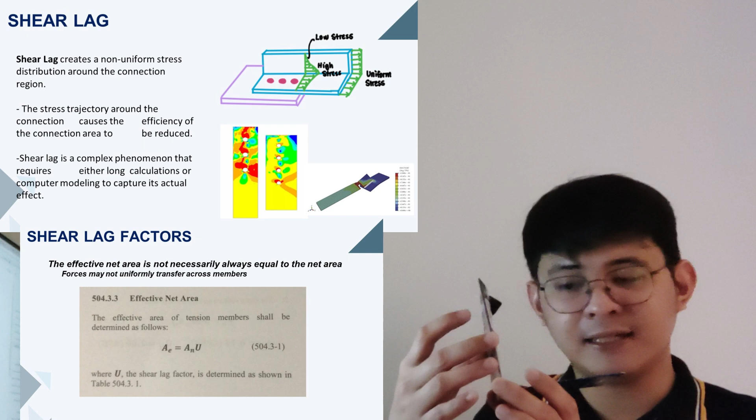of stress. So the intensity of stress will differ in this part, especially when there are holes and bolts. The effect on this part is intensified, carrying a strong stress because of the holes in this portion. And then this other part of the element receives only a little stress. So to consider only the portion with high stress intensity, we need to reduce the effect of the shear lag, the shear stresses, and multiply it by the effective net area.

Now our shear lag is defined as the reduction of the net area, wherein we multiply by a value of 1 or less than 1 so that we only consider the portion of our section that really carries high stress. And then we lessen the consideration of the element that does not hold a large stress value. That's why we need to reduce the net area, the effective area, by multiplying it with a value of 1 or less than 1 depending on the number of elements.

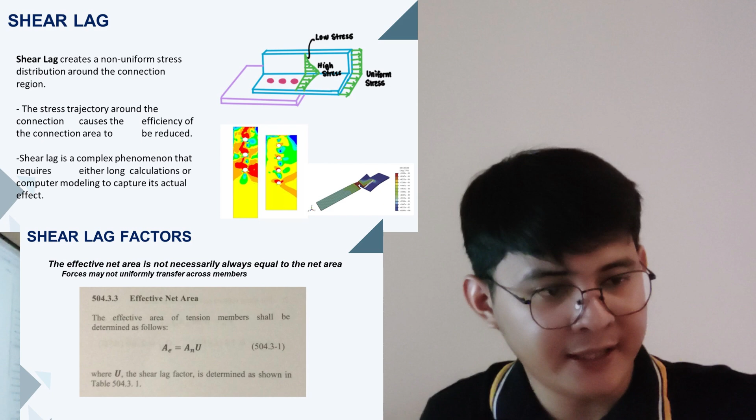Okay, so what is the formula we will use? For shear lag, here it is. Shear lag creates a non-uniform stress distribution around the connection region. The stress trajectory around the connection causes the efficiency of the connection area to be reduced. So we reduce the efficiency because of the non-uniform distribution, from high intensity in the part with the connection and then going to the less connected part. Since not all of the load transfer goes to the other section elements, we need to reduce the efficiency of our tension member.

Okay, so we expect that the distribution in the parts that are not connected has lower intensity. All these stresses are trying to exit the connection and transfer due to the shear interaction we call shear lag. Because of the bolts, right? The bolts have shear. So we need to reduce the effect of the net area to consider only the portion that results in less tension force. So, according to our code, section 504.3.3,

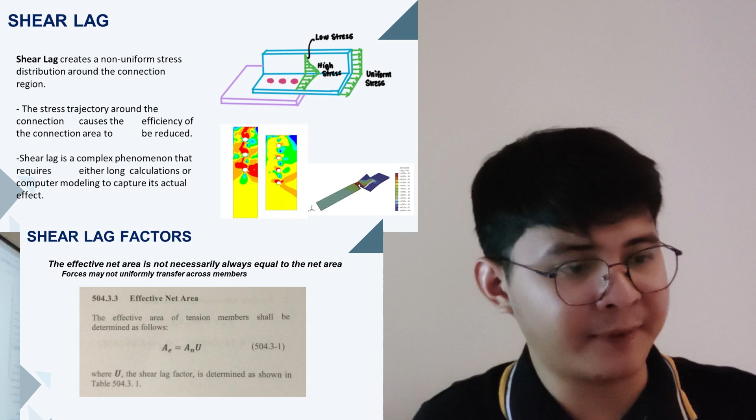to get the effective net area, we need to consider the net area, where we have subtracted the diameter of the holes, and then multiply it by the value of U. So now, what is the U that we consider here? We need to refer to table 504.3.1, or in AISC, this is table D3.1.

Now, to account for this non-uniform transfer of stresses among elements of a steel section, this table, especially in AISC and NSCP, summarizes their different research data. They sampled different sections and came up with these expressions and factors that are not complex. We have 8 cases here that we need to use in the analysis and design of tension members, to consider the effect of shear lag somehow. So we no longer need a finite element model to get the actual effect of shear lag. AISC has provided us values to somehow consider those effects of shear lag given different sections and different types of connections. It can be a welded or bolted connection.

So, note that there are multiple cases that can be applied for a given single connection. So, say for example, when we're considering wide flange, we can use either case 2 or case 7. Most of our formulas here are empirical and derived from extensive research. Isa-isahin natin yung mga shear lag factor.

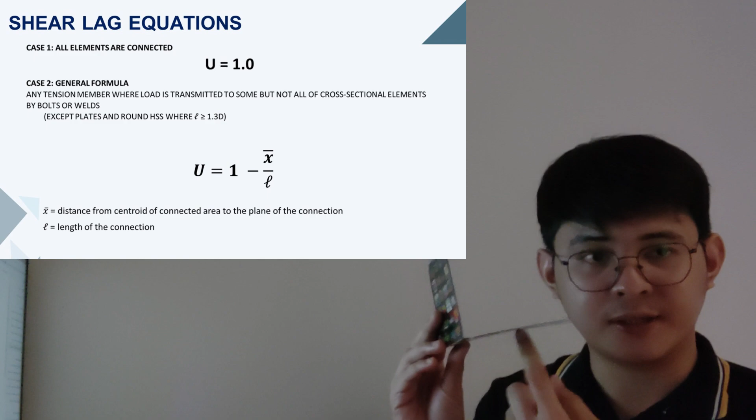So, kapag lahat ng elements ay connected, yung value natin is 1.0. Especially dun sa flat plates natin, kasi isa lang yung element, connected na siya. So, automatically, yung U natin is 1.0. Now, kapag angle bar siya, kapag itong part na to, connected din, meron siyang bolts or welded, and then itong part na to is connected din, yung gagamitin natin is 1.0.

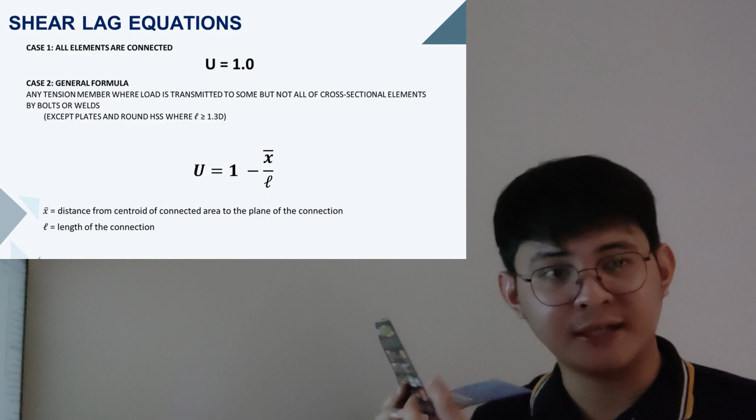Pero, kapag isa lang yung connected, kailangan natin pumunta dun sa case number 2, wherein yung formula natin dyan is 1 minus x bar over L. So, case 2 tends to apply to most tension member connections. The formula is U = 1 minus x bar over L, wherein yung x bar is the distance from the centroid of the connected area to the plane of the connection. Ito yung member natin na connected, and kung ano daw yung centroid nito, and then yung distance niya dun sa face nung connection,

yun yung maging x bar. So, may mga research na usually para mas mapadali yung analysis natin, we try to somehow make our U as 1.0. So, paano ba natin ginagawa yon? Kasi kapag 1.0 yung U natin, mataas yung value ng area natin, mataas yung value ng strength. Ngayon, kapag nireduce pa natin yan, mababawasan yung capacity yung kayang i-hold ng tension member natin. So, ano ba yung ginagawa para as much as possible, yung value ng U natin is 1.0.

So, to consider the value of U as 1.0, kahit yung connections natin ay hindi lahat ng element nakakonect, ang gagawin natin is usually nilalakihan natin yung value ng L. So, kapag mahaba yung connections natin, yung length of connection na tinatawag, yung value ng U natin is almost close to 1. Kasi 1 minus x bar and then large value of L, so almost 0 na yan. Wala na siyang isusubtract pa. So, yun yung ginagawa para mas makuha pa din natin yung value ng U na 1.0. Pero in the case na yung value ng L natin is sobrang mababa, kailangan natin gamitin yung formula na to. And then yung formula na to, nagbabago-bago pa, depende sa type ng section natin na gagamitin kasi magkakaiba yung centroid. So ngayon sa next slide natin, nakapresent dito yung different value ng x bar.

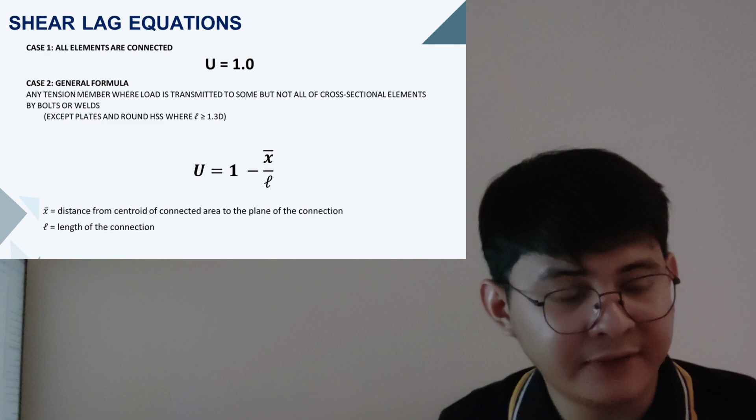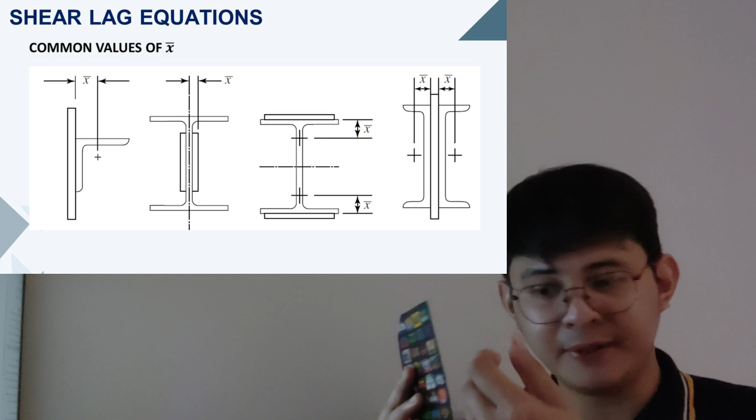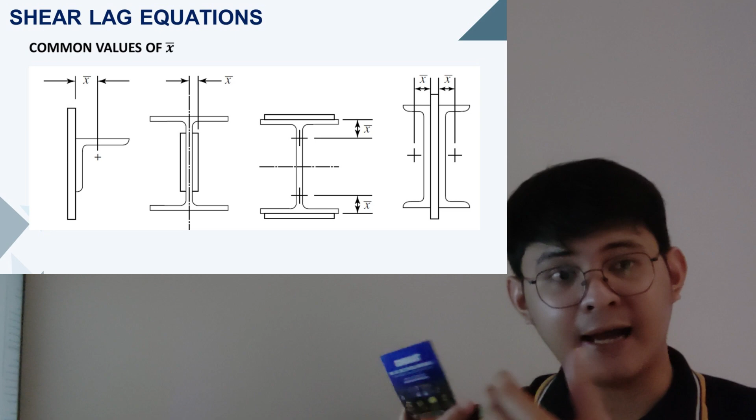So say for example, meron tayong angle bar, then nakakonect siya sa plate. Yung x bar na gagamitin natin is depende dun sa orientation ng angle natin, kasi meron tayong longer leg and shorter leg. Kapag yung longer leg, which is yun yung common, connected siya sa plate, ang gagamitin natin is x bar from your steel manual. Yun yung gagamitin natin. Pero kapag baliktad, kapag yung shorter, ang gagamitin natin is yung y bar from your steel manual. So mabilis lang naman yan, depende sa kung ano yung nakakonect.

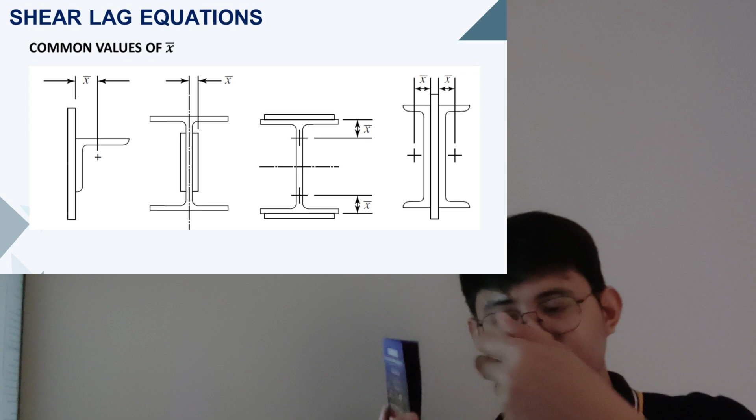So kapag ito yung longer, tingnan natin yung x bar niya. And then kapag shorter, yung y bar from your steel manual yung gagamitin. So take note, yung centroid, papunta dun sa face ng connection natin. So mabilis lang naman. Automatically, yun na yun yung x bar. Yung x bar dun sa steel manual, yun na yung gagamitin natin kapag ganito yung configuration or setup ng connection.

Ngayon, kapag meron naman tayong wide flange na pinalaman na ng steel plate, ang formula lang natin ng x bar, yung x bar na gagamitin natin is yung center lang ng wide flange plus the face of the cover plate, yung dulo ng cover plate natin. So, mabilis lang, no? Mabilis lang siya intindihan kapag sandwich siya ng plates, yung wide flange.

Ngayon, kapag cover plated naman yung wide flange natin, meron sa taas or meron sa baba, yung connection natin, ito yung wide flange natin, yung flange niya, ito yung may connection, ang gagawin natin, or yung x na gagamitin natin is just hatiin lang natin yung wide flange. So, ano yung kalahati ng wide flange? Magiging T na siya.

So, yung T na yun, sa steel manual natin, meron tayong properties ng T-section doon. And then, kung ayaw nyo isolve yung centroid from the top of the flange, papunta dun sa along the web natin, pwede kayong mag-refer dun sa steel manual and kunin natin yung hindi yung x bar. Ang kukunin natin dun sa steel manual is yung y bar, kasi yung orientation ng T-section natin is vertical. So, yung x bar na gagamitin natin is the y bar of our T-section.

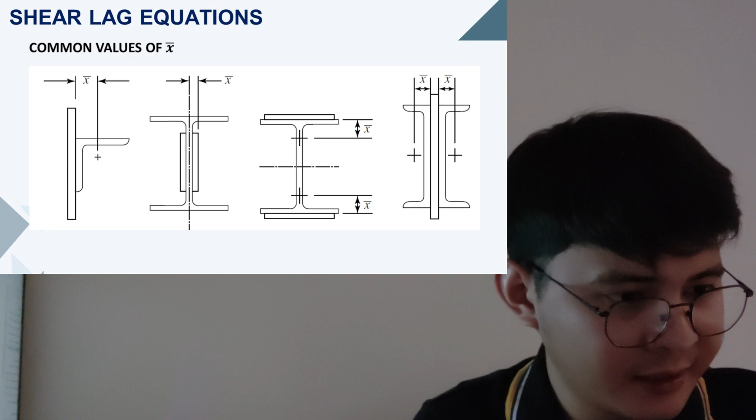So, for now, let's continue discussing muna yung mga values ng shear lag. Okay, so ano ba yung values ng L? So, kapag this is a bolted connection, yung L natin is just the end-to-end of the length of our connection. So, for bolts, kung ano yung distance center to center from the most edge unto its final or yung end na connection natin, yun yung L. And then, kapag nakastaggered naman siya, yung center to center ng first bolt natin, and then yung center din ng final bolt natin sa connection.

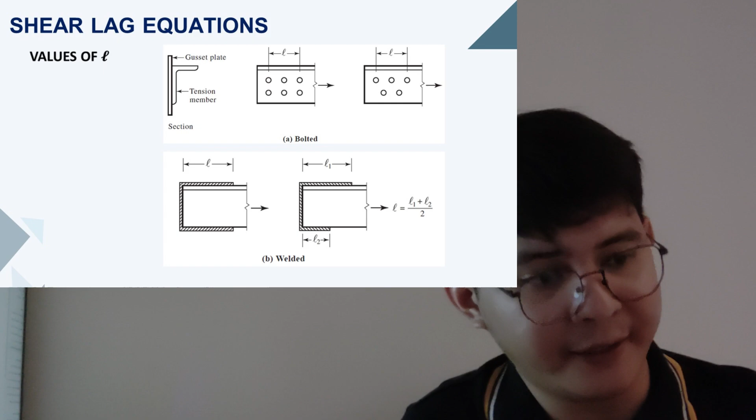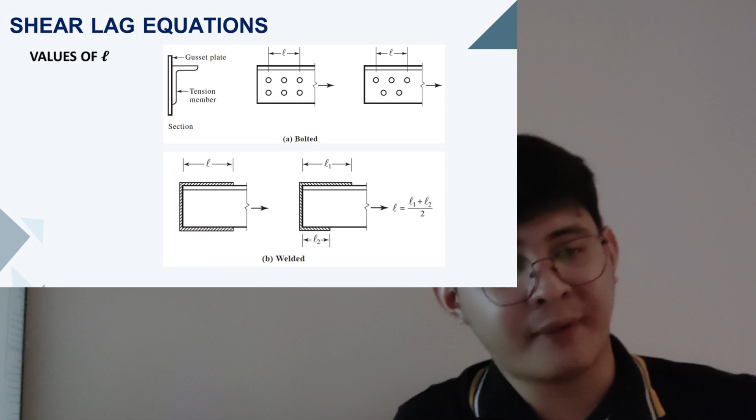Pero kapag naka-welded siya, kapag same lang din naman yung longitudinal welds na kinukonsider natin, so longitudinal welds, pwede natin magamit yung case 2. So magagamit lang natin yung case 2 kapag welded kung meron tayong longitudinal as well as transverse. So longitudinal sa taas and sa baba, and then meron tayong transverse weld vertical. So to get the value of the L for welded, kapag same lang yung upper and then lower length ng welds natin, automatically, yun na yung L natin. Pero pag magkaiba yung top and yung bottom, kukunin lang natin yung average ng length ng top and then ng lower to get the value of the L that we are going to use for the formula 1 minus X bar over L. So, yun lang, di ba?

Madali lang. Next, case number 3, this case is yung parang hindi common na connection. So, for case 3, involved tayo ng transverse weld. Kapag ganito, meron tayong transverse weld, pero kulang ng isang connection na longitudinal, ang kailangan lang natin i-consider na area is the area of directly connected elements. So, kung ano lang yung area na may connection dun sa weld, transverse weld, and then also yung longitudinal, yun lang yung area na kailangan natin i-consider for our calculation of the effective net area. So, kapag meron kayong configuration na ganito, transverse, and then longitudinal, yung area na gagamitin is the area directly connected to the elements, and yung U natin is 1.0.

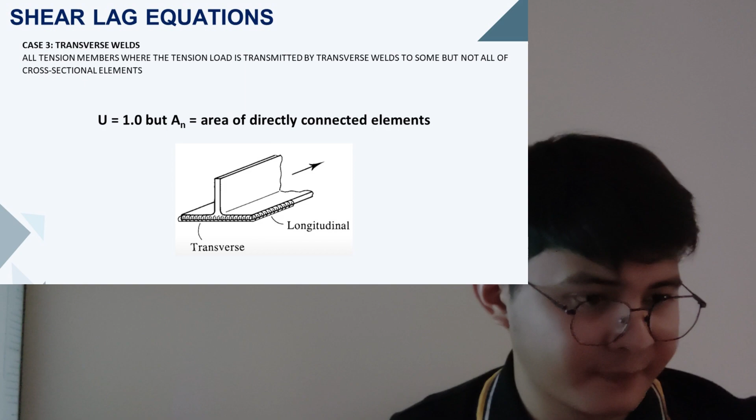So, case number 4, this is for plates and also welds. So, ngayon, kapag meron naman tayong connection wherein connected siya by a weld, pero longitudinal lang yung welds natin, we can use this provision. So, kapag yung L or yung length ng welded connection natin is greater than 2W, or yung perpendicular distance ng dalawang longitudinal welds, we are going to use 1.0. But if it is between 1.5W and 2W, gagamitin natin is 0.87. So, take note that we need to consider or solve muna the length and also the width in order to check for us kung ano yung gagamitin natin na U value.

Pero kung ayaw nyo nang isolve pa yung condition, i-relate yung width and then yung length, pwede nyo nang isolve agad yung U, wherein for approximate value of U, we can use this formula which is 3L squared over 3L squared plus W squared times 1 minus X bar over L. So, take note na yung L natin dito, kapag same, automatically, yun na yung L. Pero kapag hindi same, average yung gagamitin nating value ng L.

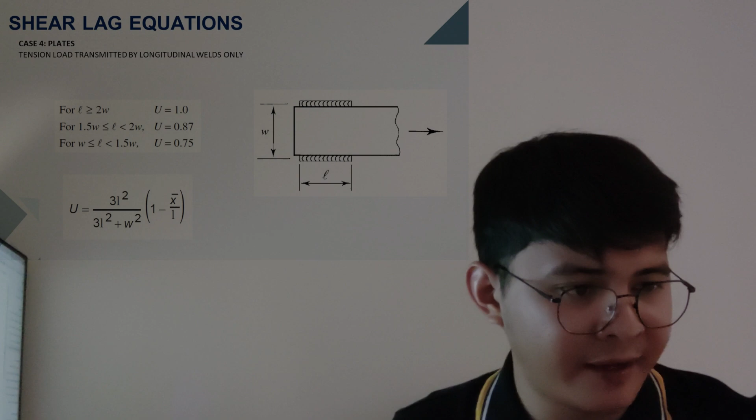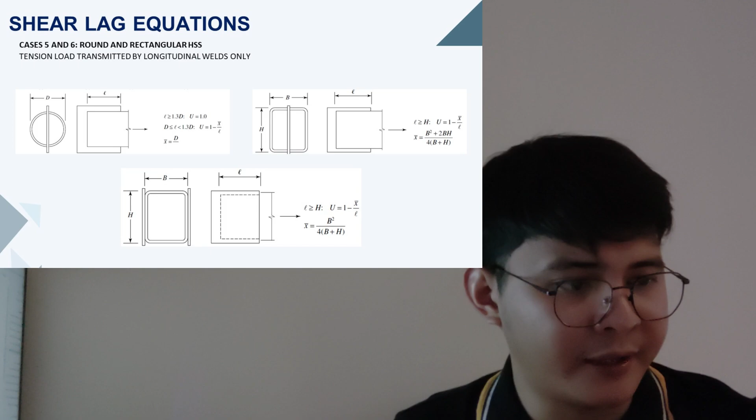Now, for the shear lag equation, case 5 and 6, this is for round and rectangular HSS. So, mostly hindi tayo solve ng problem regarding HSS. But for case number 7, this is very common for our wide flange. So, wide flange T for this shape. So, dalawa yung condition na kailangan nating i-consider. Usually, ginagamit natin yung case 7 kapag wala pa kayong length ng mga bolt connection. So, for estimation, we can use case 7 kung ano ba yung gagamitin nating U value.

Ngayon, kapag ang kinoconsider natin is yung flange, we need to check first kapag meron tayong 3 or more fasteners. So, ang fastener na sinasabi dito is kung ilan yung bolts na connected per line. And then, yung per line natin, ito yun, per line. So, say for example, ito yung wide flange natin. Wala kasing figure. Mamaya, pakita ko na lang kapag nag-solve tayo ng problem. Pero kapag wide flange naman, kapag dun sa left and right, automatically, dalawang line na yon. Pero yung number of fastener, kung ilan yung bolts dun sa line na yon. So, kapag more than 3 siya, we can use this provision under case 7 for flange. And we need to check yung value ng width ng flange natin if it is greater than 2/3 of the depth of our wide flange.

Kapag yung BF, width ng flange, is greater than 2/3 ng depth, we can use U is equal to 0.90. Pero kapag less than siya, we can use the U value of 0.85. Now, for case 2, kapag sa web naman, we will use U is equal to 0.70. Now, kapag meron kayong value ng L na,

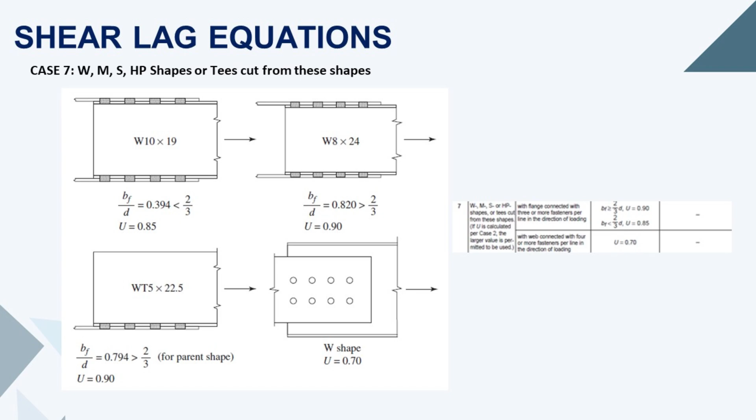and then gusto mo pang i-check yung case number 7, especially sa wide flange, so meron kang case 2, and then case 7, so dalawa yung magiging value mo ng U. Ang kailangan natin gamitin is yung larger. So, yung larger value. Okay, so, for case 7, check natin kapag yung connection natin ay nasa wide flange or nasa web.

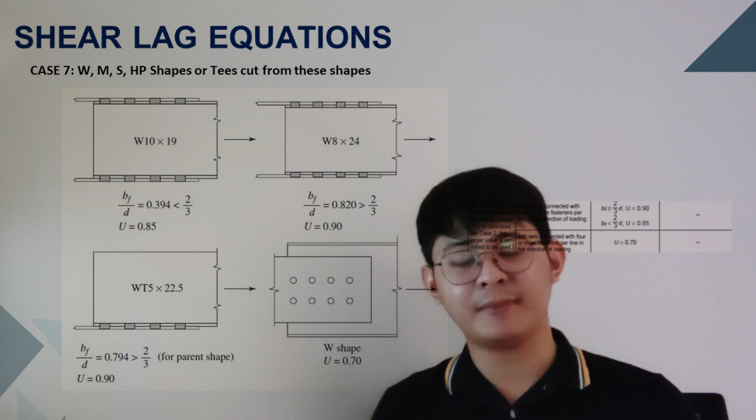And then, check natin kung ilan yung number ng fastener or bolts dun sa isang line ng connection natin. So, if it is more than 3, we can use the upper part of this code and then check natin yung 2/3 ng depth natin as compared to the width of the flange. And then, kapag meron na tayong length, we need to compare the value whichever is greater between case number 2 and case number 7. So, ang meaning lang naman yun, simplify. Kung ano yung mas malaking value ng U, yun yung gagamitin natin as a shear lag factor.

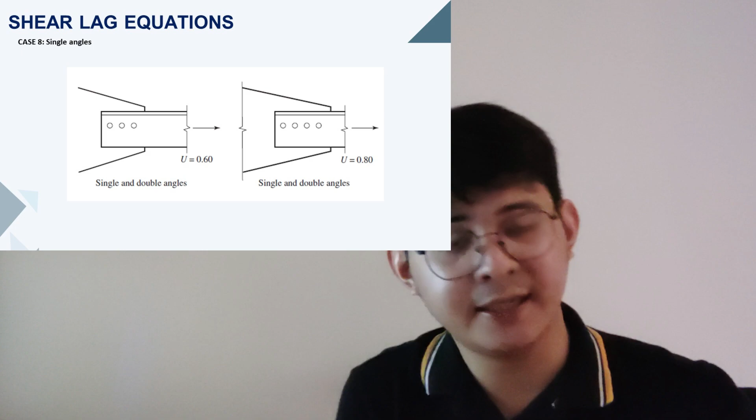Now, the case 8 is applicable for the angle bar, single angle bar, and we need to check kung ilan yung dami ng fastener natin sa isang line ng connection. So, kapag it is 3 fastener, we are going to use U is equal to 0.60 and then U 0.80. So, again, we need to compare it with case number 2. Whichever is larger, then yun yung gagamitin natin as the shear lag factor to calculate for the net area.

Okay, now moving to block shear failure. So, possible na mag-fail din yung tension member natin under a tension fracture along one path and a shear yielding or shear fracture along the shear area parallel dun sa tensile force natin. So as we can see in the images we have here na ganito yung failure ng shear natin. So it can be a large tension, small shear, and a large shear and small tension. And then according to code, in order for us to calculate for the block shear strength, we're going to use

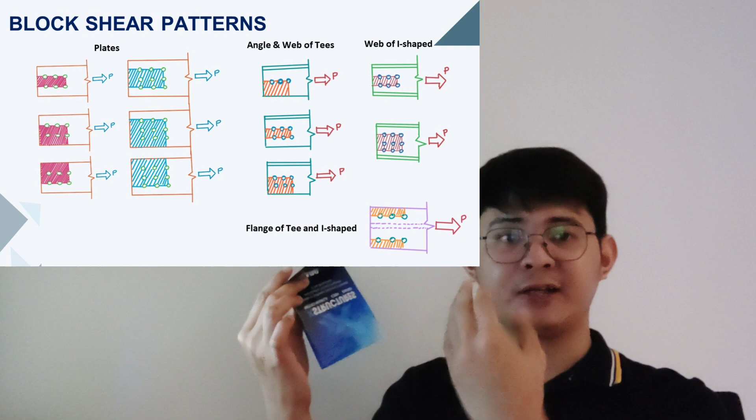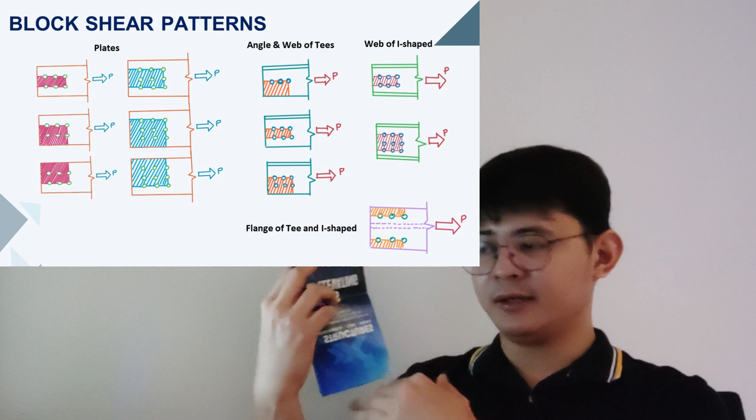So, for this one, yung angle bar natin, meron tayong connection. Yung may mga portion lang na merong bolts dito, yun yung mag-shear, yung magba-block shearing. So, it's either sa gitna or pababa. Ngayon, yung part na yun, hindi na siya aangat pa. Unlike doon sa plate na pwedeng sa taas or pwede din sa baba. Now, for the web of I-shape, so, ganun din, hindi na siya pwedeng pumunta dun sa flange niya or sa bottom flange. Nandun lang siya sa web. Nandun lang yung possible block shear path diagram or failure na kukonsider natin.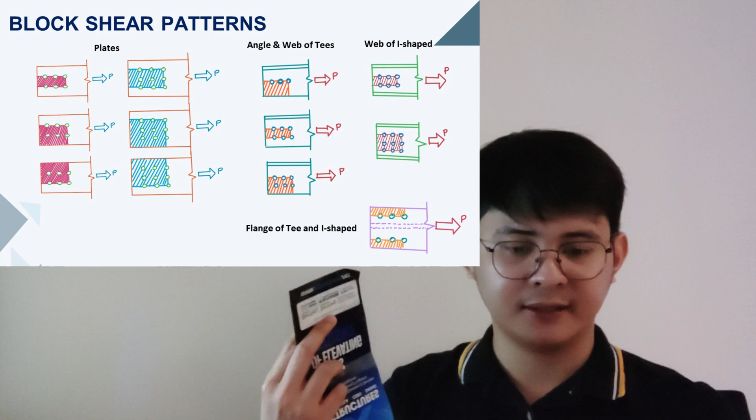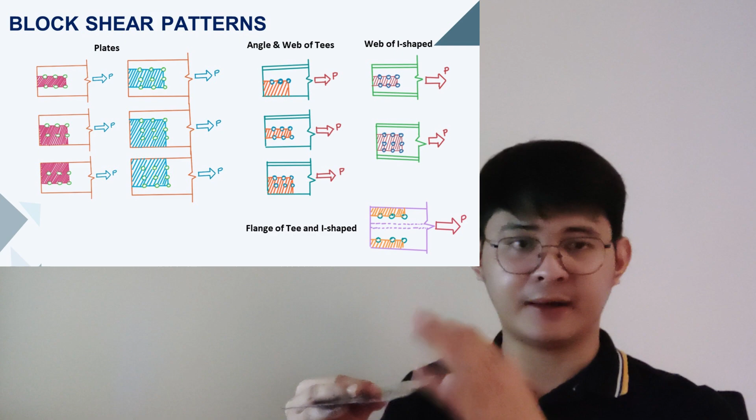And for the flange, yung flange ng T natin and of course, sa wide flange, nandito sa edge yung possible failure natin under block shear. Okay, or yung pattern ng pag-block shearing ng mga bolts natin connected dun sa element.

Okay, so for the formulas that we are going to use, according to the code, dalawa yung values na sinasolve natin. So, we have 0.6 FU, rupture strength, and then yung area net ng shearing cross-section natin, parallel dun sa force natin, tensile force, plus UBS FU ANT, dapat less than siya dun sa 0.6 FY AGV. Yung gross naman yung gagamitin natin instead of the net area of the shearing plane plus UBS FU ANT. And then the reduction factor that we are going to use, similar lang siya dun sa rupture strength natin under

net area, so 0.75 and 2, whereas the AGV is the gross area subject to shear, ANT is the net area subject to tension, and ANV is the net area subject to shear. Where the tension stress is uniform, UBS is 1, and when the tension stress is not uniform, UBS is 0.5. So, summarize lang sa table na to yung mga formulas. Ngayon, ano ba yung UBS? So, kapag yung stress distribution natin commonly is same lang naman dun sa connections natin, either welded or bolted, and then commonly meron lang tayong single row of beam, especially sa coping beam.

So, kapag cope yung beam natin, very common kasi na kailangan natin magbigay ng allowance para ma-connect natin yung another beams natin dito sa isang beam, wide flange. Common siya sa wide flange. So, ngayon kapag meron lang kayong single row of beam end connection, what we're going to use is the value of 1.0. Ito yung pinaka-common. Special case lang yung 0.5 wherein may dalawang rows tayo, although technically columns to kapag vertical.

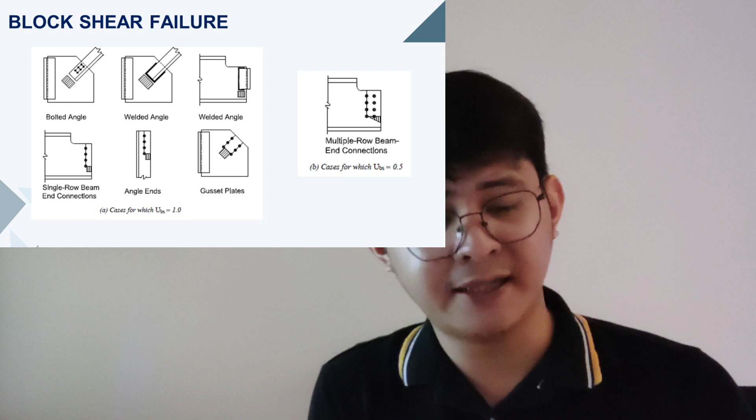So, check nyo lang kung ano yung configuration, yung setup ng connections natin na kinukonsider sa design ng block shear, and then that's the time that you can decide whether to use 1.0 or 0.5. Pero commonly, kapag single line lang naman yung bolts natin, the value of UBS that we are going to use is 1.0. Now, the formula, usually, isusolve natin parehas, no? So, solve natin yung involve yung net area ng shear, and then involve yung cross section. So, kapag cross section, yung shear natin will yield, and kapag net yung section natin for shear, ang gagamitin natin is the rupture strength. Okay, so that's it. I think we can start solving problem na.

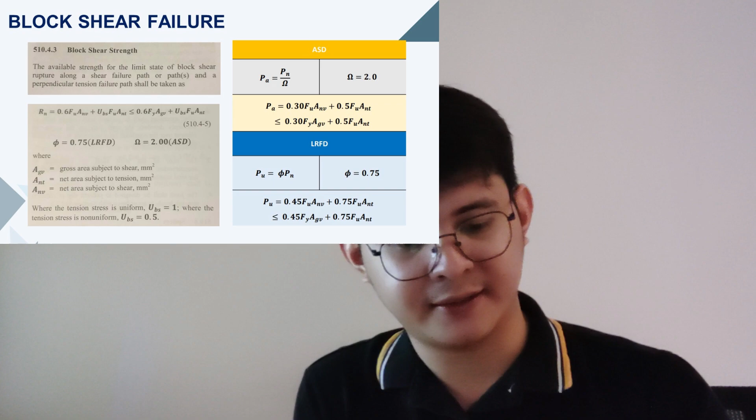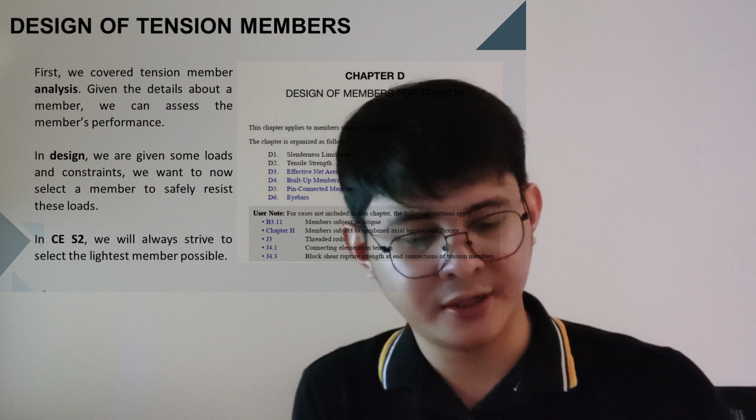Ito ba? So, design of tension members, we can refer to chapter D for the design. So, first, we cover tension member analysis. Given tayo ng details about the member, and we can assess the member's performance and compute for its capacity if it's less than the design loads. Whereas sa design, we're given some loads and constraint, and we want to know the safest member to use. So, we need to solve for the dimension kapag design. But here sa CE S2, we'll always strive to select the lightest member as possible. So, to become efficient, dapat yung DC natin or demand over capacity should be equal or almost close to 1 or more than 0.90 to make it efficient.

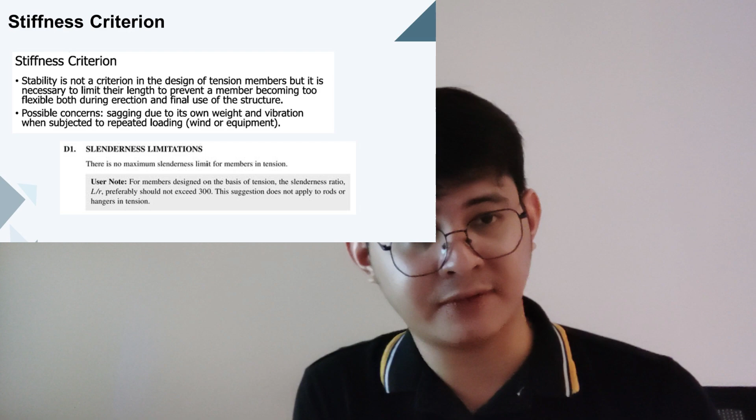Now, for the stiffness criterion or slenderness, although yung slenderness ng tension ay hindi common. Common siya sa compression. So, according to code, there is no maximum slenderness ratio, pero may commentary na we need to limit the slenderness or yung haba ng member natin in tension by limiting the value of the slenderness ratio, the length of our tension member divided by its radius of gyration na dapat hindi mag-exceed sa 300. So ngayon yung radius of gyration is just the normalized value of our inertia, moment of inertia na makukuha natin from the steel manual, or we can calculate those value of radius of gyration manually by getting the square root of the moment of inertia and then divide natin ng area ng element.

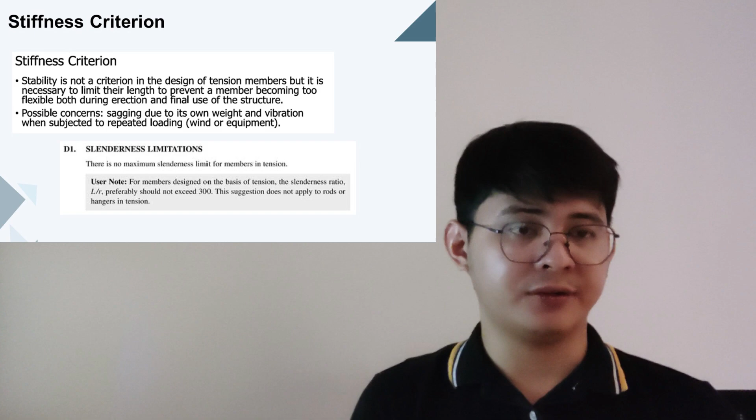So ngayon, bakit ba natin siya nililimit sa 300 although wala naman directly na sinabi yung provision na kailangan i-limit? Kasi may possibility na mahaba yung tension rod natin, and then yung mga tension natin, members, ay mas mahaba talaga yung connection, especially sa truss. So ngayon, para hindi natin ma-achieve yung 300, kailangan it's either babaan lang natin yung length ng tension member para mas mababa na yung value ng slenderness ratio, or lakihan natin yung section para mas malaking value ng radius of gyration yung makuha natin. So for that condition na kailangan natin i-limit sa 300 kasi ayaw natin magkaroon ng excessive sag or vibration yung tension member natin kapag sobrang haba or sobrang liit naman ng section.

Ngayon, ayaw din natin ng damage during shipping erection kasi yung mga truck natin may limit lang din. So, kapag sobrang haba, possible na pwedeng ma-deflect yun or ma-stretch lalo or ma-compress, mabago yung natin dahil sa sobrang kahabaan niya. So, ayaw natin mangyari yun. So, we try to limit the value of the slenderness to avoid excessive vibration and damage due to shipping and erection, and excessive deflection under its limit states or serviceability limit states.

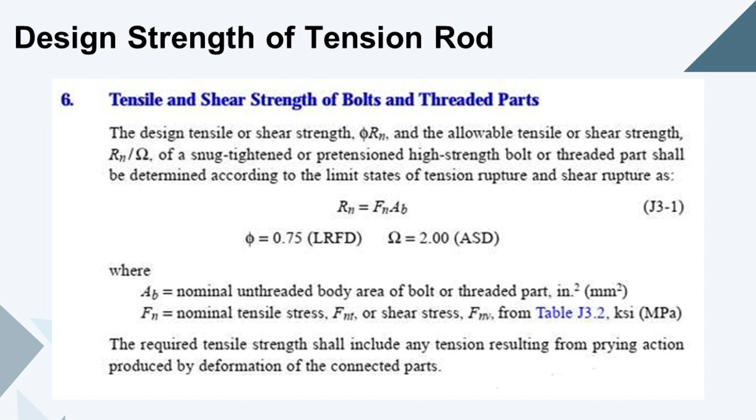So, ito yung condition. So, what are the different slenderness limits? Now, we can also design for the strength of our tension rod. Makikita natin sa code. Very straightforward lang yung calculation natin sa design ng tension rod because we are only up to the diameter